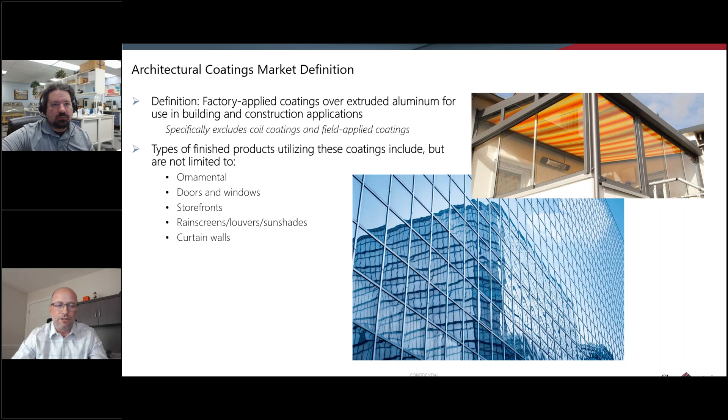Next slide, please. Okay, so market size. When you look at the architectural coatings market, powder coatings make up about 15% of the coating volume and 25% of the coating value. This market is dominated by powder coatings and solvent-borne coatings—there's hardly any waterborne coatings used whatsoever, so it's essentially zero. So it's solvent and powder coatings. If you look at the split, the market size by volume is about 18 kmt by our latest estimates, and the value is around $220 million.

As I said, you can see the split on those bars. Looking at value, powder coatings is about 25% of that value, and liquid coatings is about 75% of the value. I should clarify I'm referring specifically to the U.S. market, not global numbers. So another way to segment it is powder versus liquid. But if you dig deeper and talk to people in the industry, what they usually refer to are specifications called the AAMA specifications—AAMA 2603, 2604, and 2605.

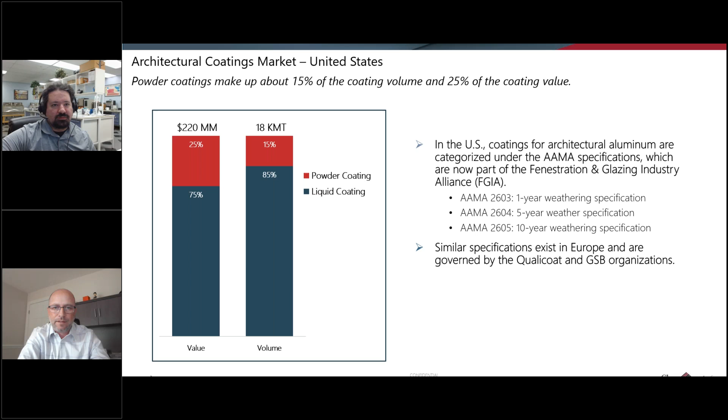Okay, so when you look at material flow, it gets a little bit complex pretty quickly, and it's all complex around the coatings aspect of things. If you take a look at those light blue boxes there, the first thing you'll see is you have coating raw material suppliers, and they sell raw materials to the coating manufacturers. The coating manufacturers will formulate and manufacture coatings and sell them into this market. After that, it gets a bit confusing.

So step down to the dark blue box where you see aluminum extruder. If you start there and ignore the part about the coating for a second, the aluminum extruder, if you're going to make a window, for example, has an aluminum extruder that's going to make the aluminum and the shapes required to make that window. We're talking about an aluminum window here.

They're going to sell that product to a fabricator or a window manufacturer. Those are not always integrated, but we're just keeping them in the same box for now because quite often they are integrated with each other - I'm talking about the fabricator and the window manufacturer. So they're going to sell the aluminum to those people, who will make the final product - in this case a window - and sell that to a builder, which is going to be used at the job site. So that's how that flow goes.

But it gets a little bit more confusing when you talk about who's putting the coating on. That's where all of those arrows are pointing in different directions in the middle of the slide. Everywhere you see a star, those are the nodes that can actually do the coating. So there's a lot of different places that can be back integrated to putting the coating on.

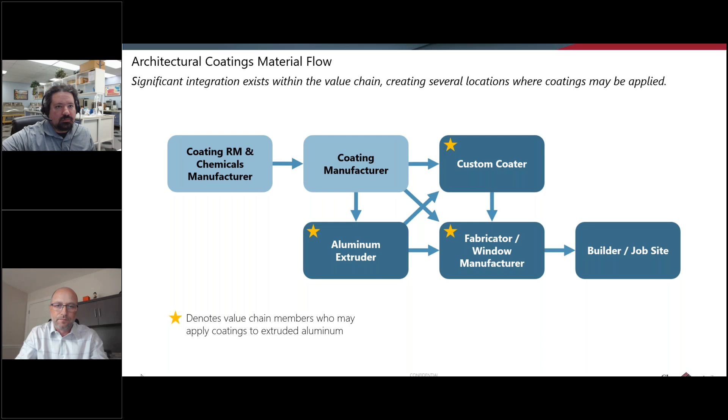Okay, so what about the application process? How are the coatings applied, if you can actually figure out who's applying it?

Well, this process is relatively complex. It's also very automated typically, because these coatings have to last many, many years, especially on monumental buildings like stadiums, or skyscrapers. They have to last a lot of years and nobody wants to repaint them many floors up. Because of that, regardless of who's doing the application, the process is audited by the coating suppliers to ensure the highest level of quality and consistency. This also helps with warranty issues.

So should the coating fail, you don't have two different people, in this case the coating manufacturer and whoever applied the coating, pointing the finger at one another and saying whose fault it is. So to solve that type of problem and make sure everything is applied properly, they work together to make sure the full coating process is such that you're going to get a very high level of quality and consistency.

So let's get into what that process looks like at a high level. First, if you went to some place doing custom coating, they specialize in coating application, the room, especially the outside of the room, would be taken up by large pieces of equipment used for this process. Usually there's a conveyor belt going from one stage to the next around the building.

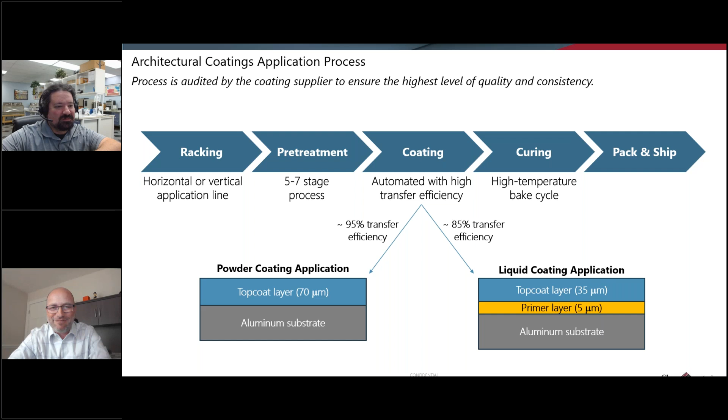So advantages of liquid coatings and advantages of powder coatings. What I typically say is they both have advantages and disadvantages, and you should use them in the right situations. But since these are all going towards architectural coatings on aluminum extrusions, there certainly are pluses and minuses. And so if you look to the left side here, what I say on the top bullet point, and it's important, is that both of these can meet the AAMA 2605 specifications.

I mentioned earlier that powder coatings are a much smaller market in the US, but these are used pretty extensively in other parts of the world, like Europe. You talk to people in Europe, and a lot of times they'll say, well, if a powder coating can be used in this market, it will be used. That doesn't mean it's 100%, but it's used quite often in Europe. So the reason it's not used in the US is not because they can't perform well. They both can meet the most stringent specifications here.

But when you look at advantages and disadvantages of each, the liquid coatings offer a wider variety of colors and shades. And when I say shades, I'm talking about the gloss range. So the gloss ranges are easier to manipulate in liquid coatings than they are with powder coatings. They still have a pretty good range in powder, but it's just not as wide as it is in liquid.

And we're talking colors here. I'm talking mostly about things like metallics and other types of effect pigments. Those just show up a lot better in liquid coatings than they do in powder coatings. Powder has made a lot of gains to close that gap over the years, but liquid coatings still excel in appearance with those types of coatings.

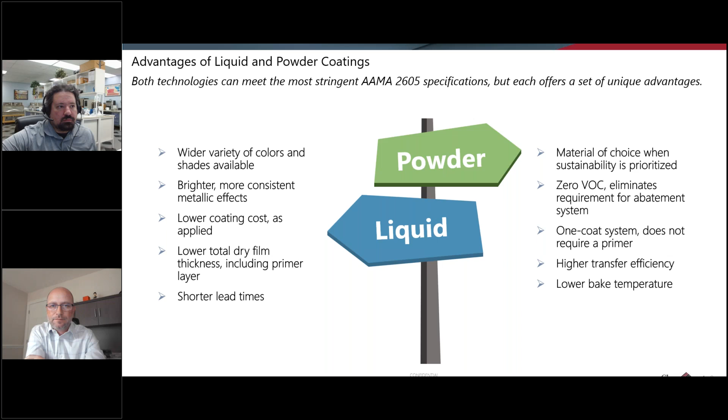Next slide, please. All right, it's Nathan's turn. All right.

Happy Thursday, everybody. I'm going to talk a little bit about the general types of powder coating chemistries that are available, where they fit into the architectural market, as well as some of the specifications that Eric briefly touched on, and then how we do testing for those types of specifications.

So this slide talks a little bit about weathering test methods. Really, the gold standard, the king of the UV durability test methods is just putting it outside in Florida and waiting a long time. That's the most relevant and the most repeatable sort of method, but it's not really practical to take every single formula that you make and leave it in Florida for 10 years and see what happens. So we have a variety of accelerated test methods that we can use.

There's QUV, which is a test chamber. Oh, there's one behind me there. Depending on what sort of bulb you use, it has peaks in different wavelengths, and it's basically a very aggressive test that is mostly UV light, and it's very hard to correlate to Florida though. So you can compare different materials with each other and see which ones perform better, and you can also take materials with known Florida performance and compare your formulations against those.

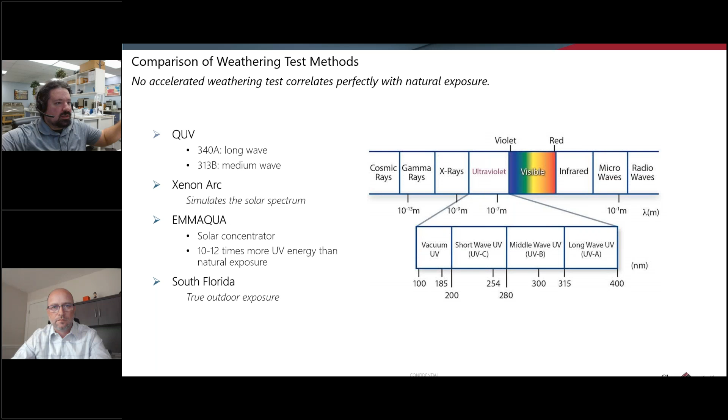I think it's worth pointing out, most people on here are coatings people, it looks like, but in case you're not, the specifications are written around South Florida. The rest of the tests are all designed to try to get a feel for what's going to pass and what's not going to pass those types of South Florida weathering, right?

Yeah, exactly. So the major specifications that we refer to with architectural coatings, it's AAMA. It's actually now called FGIA, which I'll never get used to, the Fenestration and Glazing Industry Alliance. That's the major one that's used in North America.

The interesting thing about the AAMA specification, though, it's a self-certification. There's not a board or a body that says that you are compliant with AAMA specifications. That's up to the paint manufacturer to specify, yes, this material is going to meet the requirements of this different level of AAMA specification. And so it's up to the paint maker to make that claim, and also to back it up with data or with a warranty if they don't meet it.

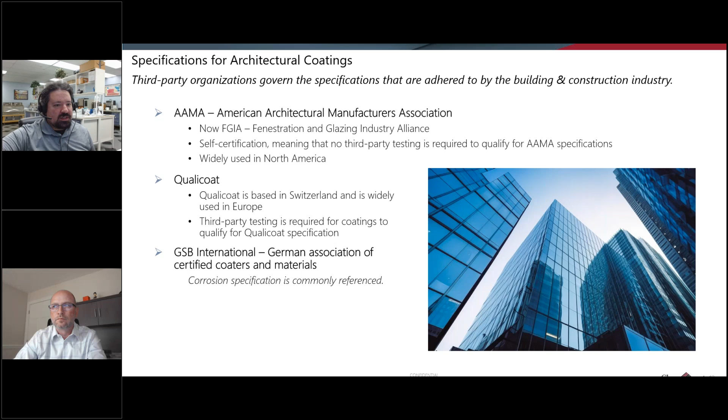There is a salt spray corrosion requirement for these. Since it's on pre-treated, typically chromated aluminum substrate, with powder coatings, we really don't have a problem hitting high levels of corrosion resistance on aluminum. If it's on steel, 1,500 or 3,000 hours might be tricky to get with a single coat. But with properly treated aluminum, these are not that difficult.

But there is a difference in test methods between the 2603, 2604. Those are a neutral salt spray, 5% salt solution, constantly running. ASTM B117 is kind of the most common salt fog or corrosion resistance test. The difference with 2605, it's called ASTM G85 Annex 5 or Prohesion. It's a more dilute solution, but it's also acidic, and instead of constantly running the fog, there's an hour of fog and then an hour dry off period at an increased temperature. And so it's really aggressive.

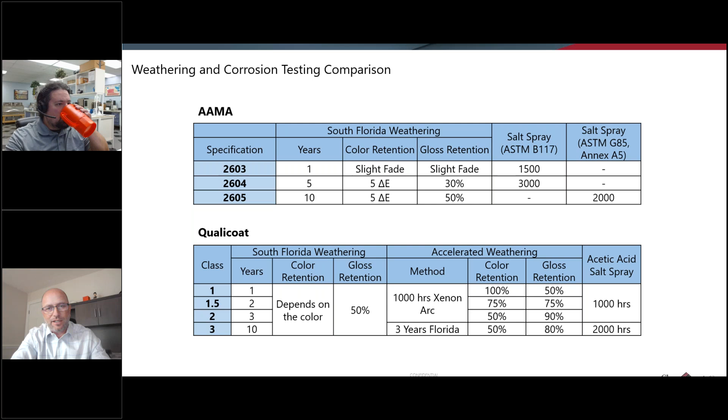Yeah, Nathan, just to add on, I mentioned earlier that if you go into the AAMA specifications or the Qualicoat for that matter, there's a laundry list of tests. You're just showing here the weathering and corrosion, but if anybody looks at the specs, you're going to see impact resistance, falling sand, chemical, even mortar resistance. But this is typically what's talked about when people are differentiating between 2603 versus 2604 versus 2605. These are the big differentiators.

Like, even a lousy powder coating is not going to have much issue with Windex resistance. Yeah, I'm not sure about solvent-borne. They don't do that well, but not these types, yeah. So I wouldn't say those are a given, there's a set of chemical tests, you need to do them, you need to check them out, but powder coatings are pretty resistant to those sort of things.

Talking a little bit about Qualicoat, there's class 1, 1.5, 2, 3. The interesting thing here is that the color retention actually depends on the color, which is kind of cool. So they have a table of RAL shades of colors that are generally used in architectural, and depending on the color, it might be a very small margin or a large margin, and that's because

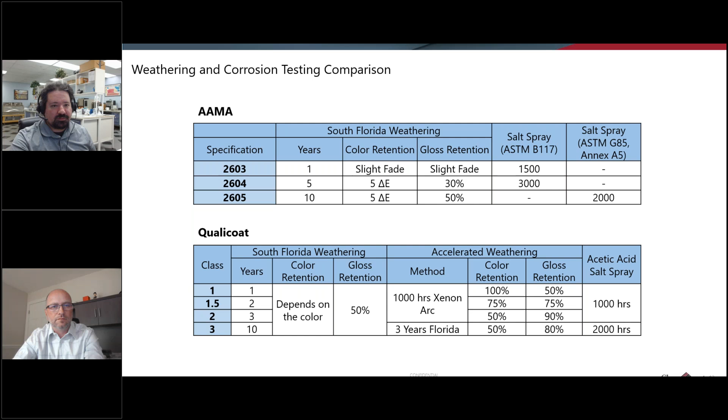All right, so when we're formulating a powder coating and we know that there's an architectural requirement involved, then you can pretty much categorize all the powder resin types, all the powder chemistries that are out there, by their UV durability. And so if I'm asked to make a coating that lasts X years in Florida, that automatically kind of drives which sort of powder chemistry you're going to have available.

Every component of the formula can affect the exterior durability. You can make the greatest, most weatherable stuff in the world, and then you put in a pigment or an additive or wax or some material that doesn't have exterior durability, and you're just not going to ever be able to make it to the full course of the testing.

Another thing I put is ask suppliers for weathering data, because as I said, it's not practical to test every coating for 10 years before you sell it to your customer, or 5 years, or 2 years, whatever the requirement is. And so we do rely fairly heavily on the materials having been tested properly to be able to take that knowledge and data, translate it into a formula, and then have a high degree of confidence for our customers that we can say we certify, we believe that this is going to last 5 years exterior.

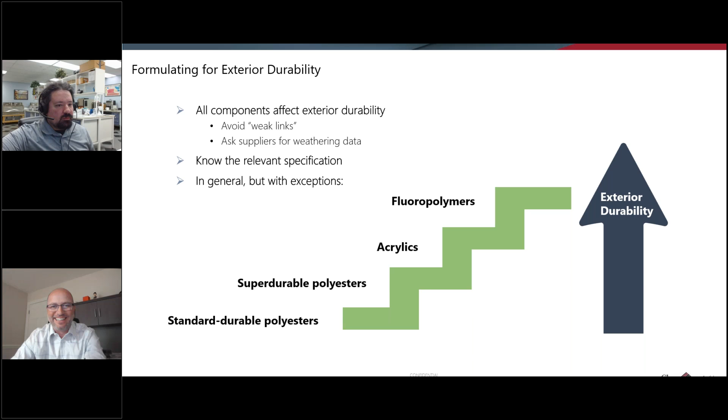Nathan, just as a time check, we've got about 15 minutes left, but if we want to leave some time for question and answer, we're going to have to. All right, I won't. Yeah. Okay. Next slide, please.

All right, this is just the difference between standard durable and super durable polyesters. For one, that terminology refers to the resin, not the actual formulated coating, although I think people do use that term quite a bit. But it's just a monomer change. You go from terephthalic acid to isophthalic acid, and the UV durability is increased by quite a bit. Besides that, the polyesters are very similar to each other. They can be acid functional, they can be hydroxyl functional, standard bake, low temperature cure bake.

And I've been asked, well, if super durable is more durable, then why don't we just use that for everything? Why would you use a standard durable? The durability here is only referring to the UV resistance, not any other property of the coating. It doesn't mean it's more scratch resistant or more chemical resistant or anything like that.

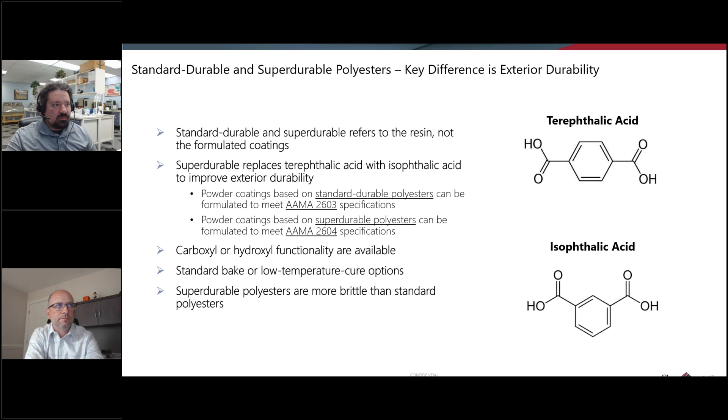In fact, the super durable polyester resins are more brittle than the standard durable varieties, and so whereas standard durable polyester has, say, full impact, it has the ability to max out the impact resistance test of 160 inch-pounds, the super durable polyester is going to be a lot less flexible, more like 40 inch-pounds. Next, please.

Crosslinkers. I probably don't have to get too far into this, but the carboxyl functional polyesters or acid functional polyesters in North America, we still use TGIC. It's pretty great, but there are regulatory issues. In Europe, they completely shy away from the use of TGIC. Instead, there's HAA or Primid that they use as a curing agent.

You can actually use acrylics to cure with a polyester. That is a useful way to adjust the gloss, because the incompatibility of them makes it actually a pretty nice lever to pull for a gloss adjustment. And then again, polyester with an epoxy in it is not going to be weatherable.

Hydroxyl functionality, typically going to be cured with an aliphatic blocked isocyanate. Those have a blocking mechanism that comes off when it hits a certain temperature. The key thing here is that they have to be aliphatic. There are aromatic versions of blocked isocyanates, but those are not weatherable. Obviously not going to be able to use those for architectural coatings.

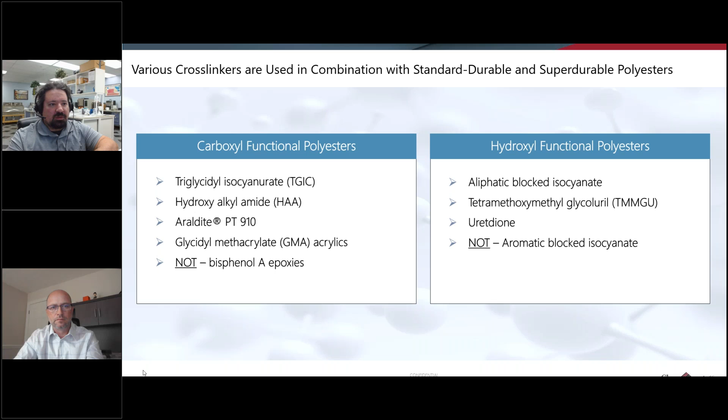And I mentioned TMMGU. That's very specific. That's only for when you're making a wrinkle, but if you use that with a super durable polyester, you're going to be able to achieve the same weatherability as if you were curing it with an isocyanate. Next.

All right, and then hyper durable is the term we use for the AAMA 2605, Qualicoat Class 3, the most weatherable, UV durable coatings out there.

And the two major chemistry types there. On one side we have PVDF. It's not as common in powder coatings, but that's what they use lots of in liquid coatings. It has a history - you can go find a building or a bridge or a water tower that was painted 50 years ago, and it's still going to look good.

The reason it's not as prevalent in powder coatings is that it's a thermoplastic as opposed to a thermoset. So it has higher molecular weight, higher melting temperature, and it's just more difficult to process using our standard powder processing equipment. There are - it's a small part of the market, but they do exist - people make powder out of PVDF, compound it with the pigments and additives to make it meet the specification, and then you can spray that on parts and bake it.

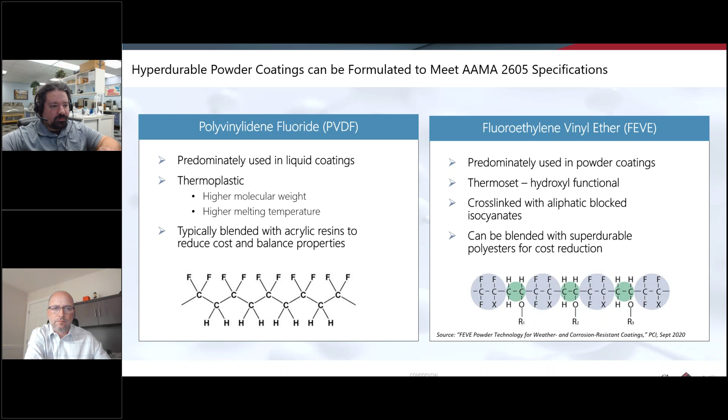There's occasionally these are blended as well with either a super durable polyester or a hydroxyl functional acrylic. Just because, again, the requirement says 10 years, and these can easily get 25 or 50 years of UV durability if they're formulated as a pure FEVE powder coating. Next slide.

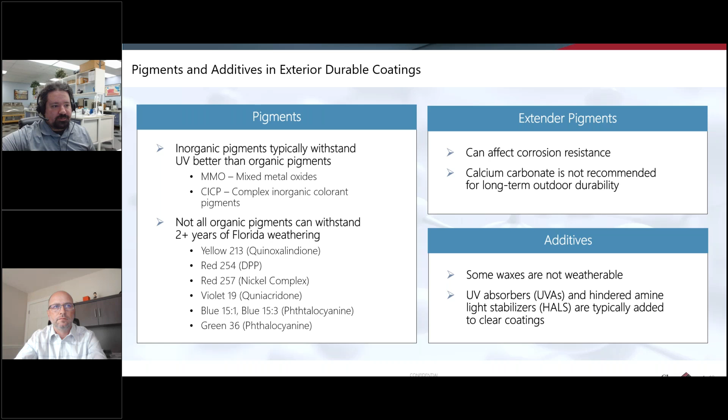So yeah, if you're using a polyethylene or something that's not weatherable in an otherwise highly durable coating, then you're going to get chalking, you're going to get photo bleaching, you're going to get very obvious signs that the coating is not weatherable. Next, please.

So this is back to me. We just wanted to cover, to finish out with some active areas of research specific to architectural applications. And we have 3 major bullet points there.

The top one is almost always going to be related to some type of sustainability, especially right now. There's a lot of potential regulation around PFAS containing products. As Nathan showed, both of the products that can meet the 2605 application, which are the highest weatherable applications, are fluoropolymers. We also didn't talk about PTFE or Teflon materials, which are used a lot to create textured powder coatings, and also to modify for mar resistance and scratch resistance, mostly mar. Without getting into a debate about what should happen or what we believe is going to happen, what you need to know is people are not taking the risk of not doing anything.

So coating companies and raw material suppliers are trying to find materials that could replace these, which is much easier said than done. But at any rate, there's a lot of active research on PFAS-free materials, or materials that don't contain any fluoro, because they may eventually become called PFAS-containing materials.

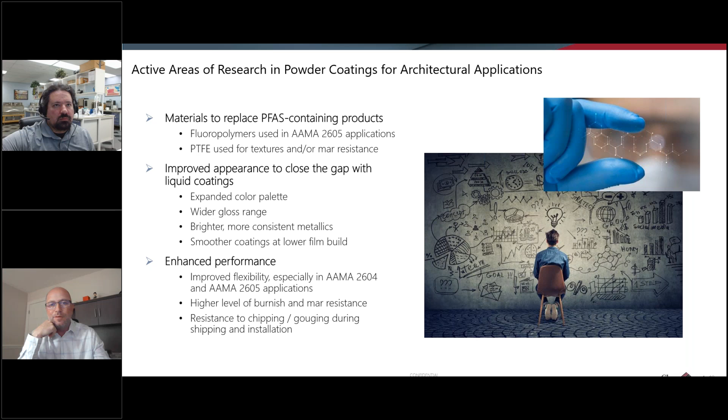I don't know, Marcus, what the rule is, but I'm okay to go over if we have some questions we want to field. That's what we have to present today, and I appreciate everybody attending.